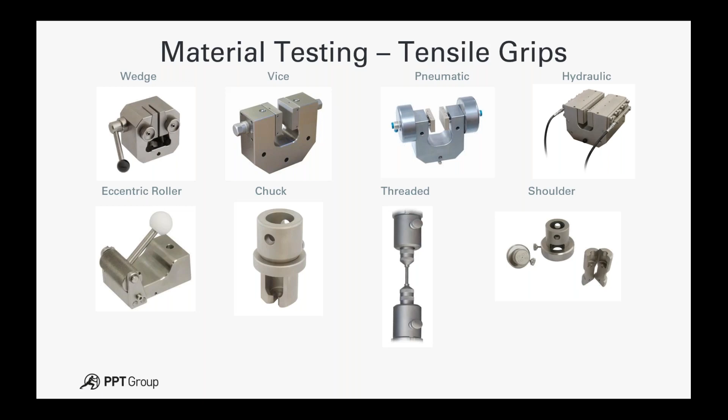Or if you just want to hold typically the round samples by the shoulder of the dumbbell, you can use a shoulder grip. And then other materials like ribbon and webbing have specialist grips, as do ropes, yarns and threads for the textile industry. And then something generic like a pincer grip.

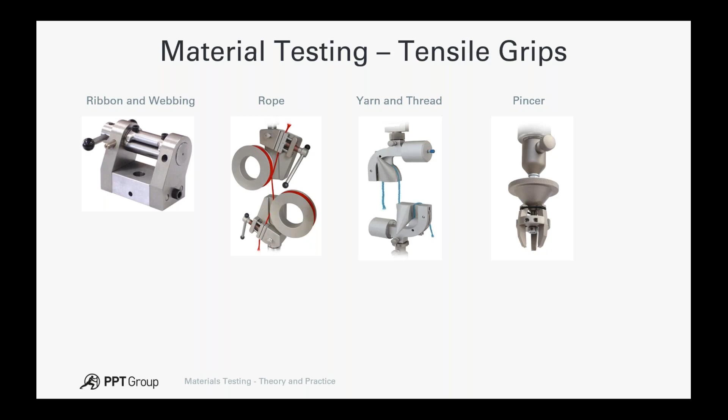There are even many more types of grips than this that we can facilitate for different samples. And of course, each one of those grips, or the majority of the vice grips, wedge grips and stuff, have different faces, so faces tend to be interchangeable. You'll select the face based on the material you're testing. What you're trying to do is create the maximum amount of friction or surface contact between the gripping face and the sample itself.

So the very basic ones, we have pyramid. If you have rounder samples, we have V-notch, which has a slight V indentation in it, suitable for round samples. Cross-cut, where rather than the hashed pyramid, it is a straight cut which goes against the direction of pull, so it bites into the sample.

Diamond coated, wave ones for textile to increase the surface area gripping. For things like paper, we have a line contact, where one face has a bar with a single line going across it, and we have wide V and rubber faces. You can also get plain faces. These are quite useful for testing some materials where you can bond a surface coating onto the plain face. People tend to use things like sandpaper and wet and dry paper to give a bit more friction - that's something you can do with a plain face.

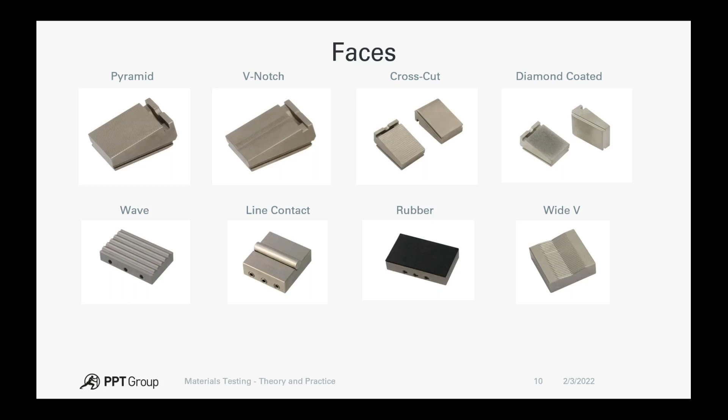So some considerations when you're looking at your tensile grips. First of all, the tests are performed within the grip operating range. Grips are sold or manufactured to have a maximum rated force for the grip. This is not just about the physical test itself, it's for the structural integrity of the body of the grip. So bear in mind, that's something to consider when choosing a grip based on your maximum forces involved.

Your clamping force is contained within the grip body. What we mean by that is you'll maximize the amount of contact area between the sample and the face of the grip. You can cause damage to grip bodies if you don't insert the sample correctly and use the whole of the face, or at least up to 80% of it. Otherwise, you're pinching the end and mechanically straining the grip when it's trying to make contact with the sample.

And of course, one of the very important things is your specimen alignment. You need to make sure that your specimen, when you place it into the grip, is both centered and parallel from the top to the bottom grip. You can see on the small picture there, on many of the grips on the top we have a small sliding alignment tool, which makes it a lot easier for operators to set the depth of the sample. So when they slide it in the grip, they touch against that and it sets the specimen centered and parallel between the upper and lower grip.

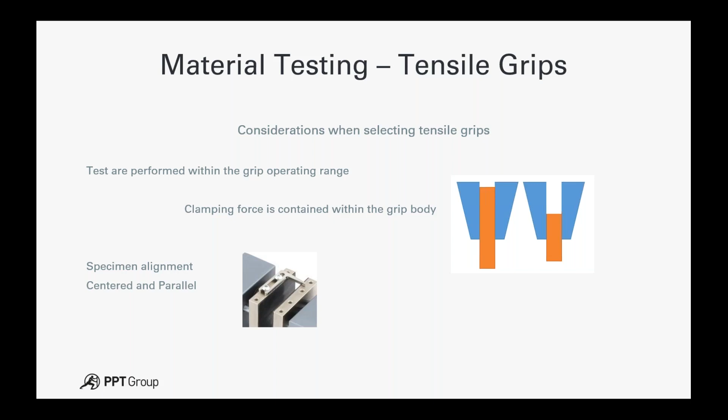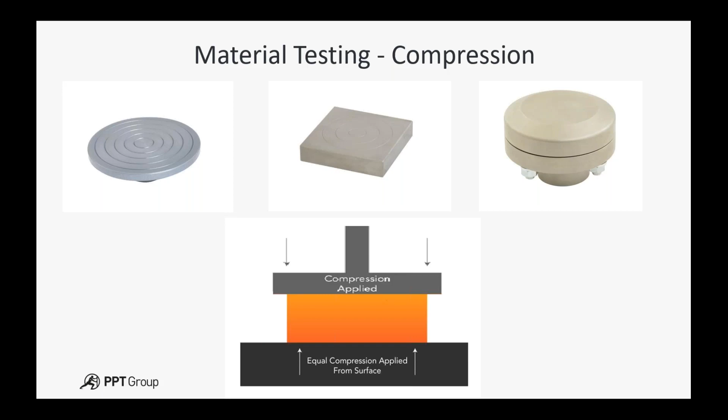Tensile testing is obviously one of the most popular ways of doing things, but also you've got compression testing. You tend to use the bottom of the machine, what we call the lower crosshead. You can have matching upper and lower compression platens, or you can mix and match them - round, square. You can have compression platens that are self-aligning, which helps somewhat with samples that are slightly irregular or not square.

So what to look for when you're doing compression testing: the plates must be larger than the sample. If they're not, you're more than likely performing a penetration test. So you want the plates larger than the sample.

Also look at the hardness, the surface hardness of the compression plate you're using. If you were doing compression on steel, you wouldn't want an aluminium plate, so you want to increase the surface hardness of the compression plates. When manufacturing your samples as well, trying to get the ends of the sample as flat and as level as possible will also help with things like off-center loading.

As I said before, you can have a self-aligning plate that does help, and we tend to recommend these for most applications. If you're looking at doing high force testing with very small distances in compression, it's probably sometimes better to involve some kind of external deflection measurement.

It's normally recommended, because you have compliance in the system. You obviously have movement in the grips and fixtures. They're normally tightened up at zero force by the operator when fitting them. You can pre-stress them and apply a force before tightening to try and remove some of the compliance. You've also got movement in the load cell, and to some extent some movement in the testing frame itself.

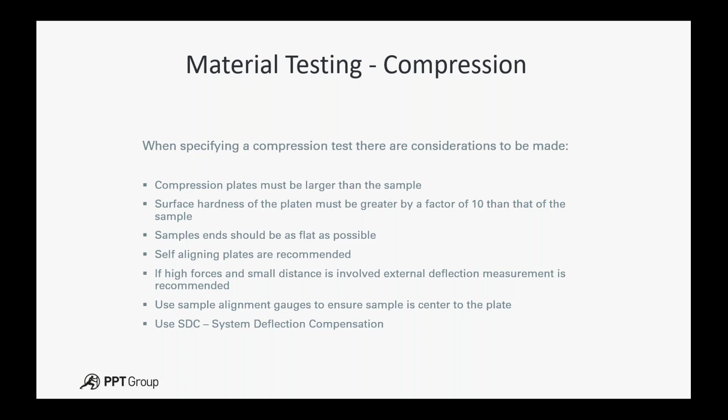Another commonly used test is the flexural or bending test. The two most common are the 3-point flexural test, supporting at either end and applying force in the center of the specimen, or the 4-point flexural test, where we again support both sides of the specimen but have 2 loading points, which can be at varying distances from the outside supports. This gives a more overall bending, whereas the 3-point gives a point contact.

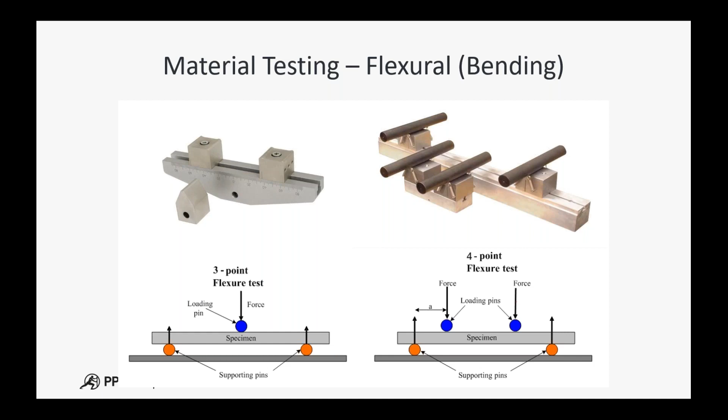But when you're doing bending tests, things to consider: is your span - the distance between the 2 supports - long enough, and what's the depth ratio? If you have a very long span and your sample is reasonably flexible, you'll be bending and moving down in the center quite a lot, so you've got to make sure the supports are high enough. Also consider your support radius, both on the bottom and the top one, which we tend to call the nose - are they wide enough and hard enough for the sample you're testing, particularly if it's a metal or a ceramic.

So, support height - ensure it doesn't bottom out. Now, are you going to use direct measurement? Are you going to use the crosshead, which measures on top of the sample, or an external device measuring deflection underneath the bottom of the sample - that could be an LVDT or deflectometer? Again, this is another case where you could use SDC, the system deflection compensation, as part of the test setup.

In 3 and 4 point testing, the peak stresses are produced - as I said, in the 3-point flexure fixture it's at the midpoint or point of contact, with reduced stresses elsewhere, so it's a localization of the stress in that area. Whereas the 4-point flexural fixture produces a peak stress along an extended region of the specimen, exposing a larger area for looking for potential defects.

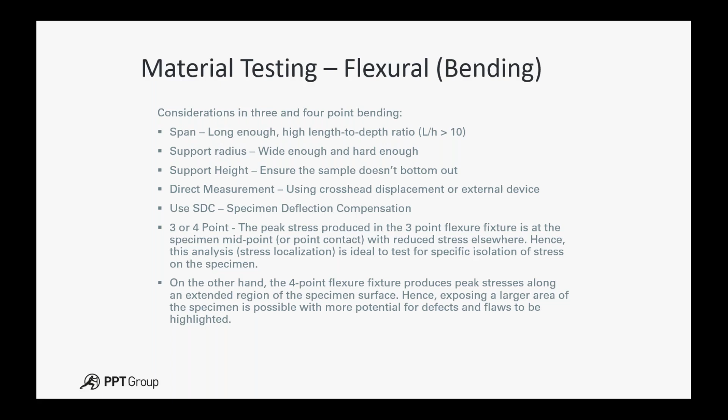Shear testing is another common method of testing. It tends to be used with adhesives and fixings where you're bonding 2 things together. You can do it in tension or compression, and there are many different types of setups for the shear.

So if you are going to do an offset shear, if we go back and look at that, you'll notice that the grips need to be able to move from both sides of the gripping face. So the vice grips are very well suited to this, because you can move the 2 faces independent of each other, so you can apply an offset.

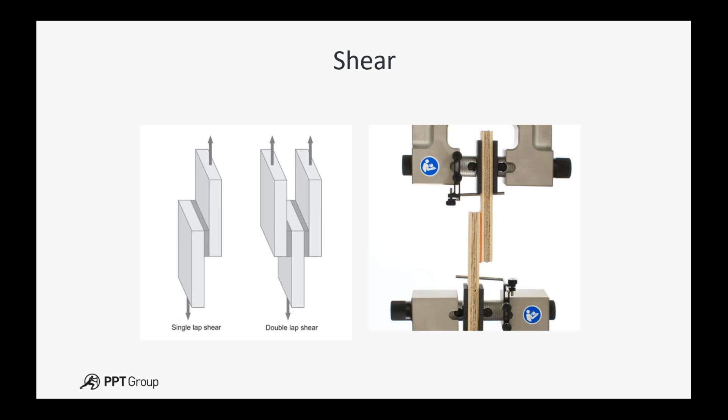If you look at that picture, the center line of the loading is down the center of the sample, as opposed to any twisting or bending motion. So there's some things like cantilever shears, rail shears, bolt shears, Iosipescu shears, where we're taking 2 halves of the sample and applying a force across them to make a shearing action.

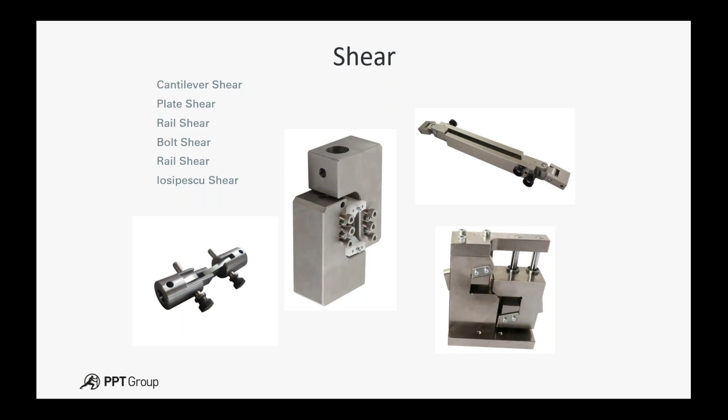One of the other things people will need to do is to prepare their samples, and there are lots of different ways of preparing samples. One of the simplest ways, which tends to be done with rubbers and thin plastics, is to stamp out the sample using a cutting die.

So you can have various shaped dies. They tend to be down to standards, but people can make custom dies for different applications. And you'll need a die press to press it out, although you can use the testing machine, because you can mount these dies on the frame of the testing machine and use the machine to stamp out the samples.

Although if you've got a lot of throughput of sample testing, it does tie the machine up while you're sample prepping. So a standalone version can either be manual or pneumatic, or some people even do hydraulic presses for doing that. Of course, with plastics, you can do injection molding.

Some companies sell small injection molding machines for making samples, or CNC profile cutters. They are actually quite reasonably priced now, even for the DIY enthusiasts. So you can use these for cutting out profiles for different materials to the required specimen sizes.

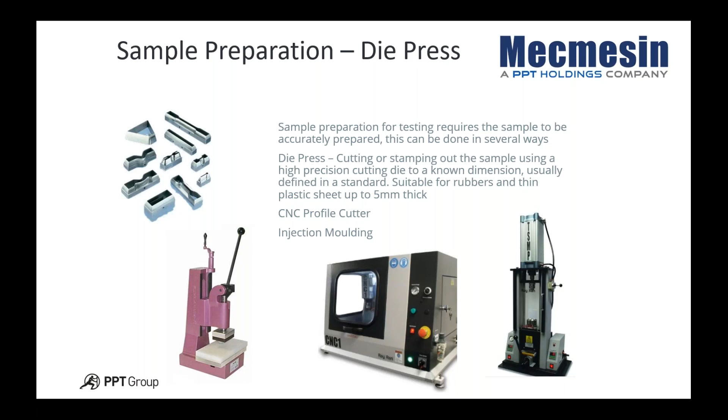They are recommended, they have their preferred sizes, although they are not fixed in stone, so you do not have to specifically use that one, as long as you're adhering to the guidance on production of the dumbbell sample, and you're getting your width to diameter ratios and your radiuses of the curve section to the end tabs. So there's some common rules in there, but the majority of people will select one of these from the testing standard

to do their testing on. And each one of these, as I say, does depend on, particularly for something like ISO 527, the type of material that you're going to be testing with.

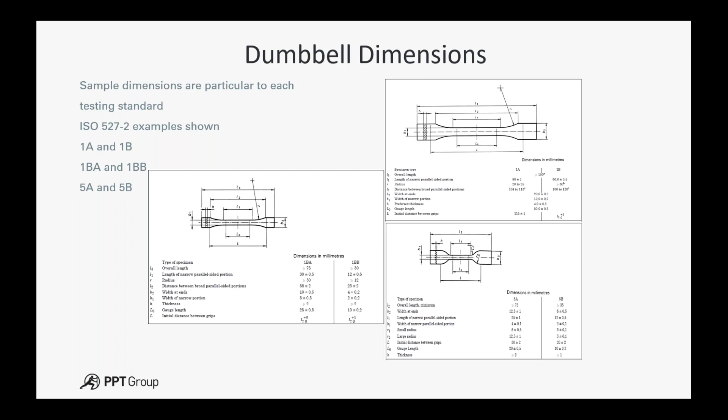So if we're doing testing, we can test at our standard laboratory temperature, or if the product is going to be used in a harsher environment at higher or lower temperatures, then we have to consider making the environment more suitable for the testing. So there's a couple of ways you can do this.

You could precondition the sample prior to testing, transfer it to the testing machine and do the test, although that would incur either heating or cooling of the sample as you move it between the conditioning chamber and the test machine, and it's quite time consuming to do. They're always a little bit difficult when you've got something that's hot or extremely cold to do.

So the solution to this is to do it on the testing machine. Now, testing machine chambers, call them a thermal cabinet or a thermal chamber.

They're limited in what they can do as far as the temperature range goes. The current ones we have range from plus 280 degrees C to minus 80 degrees C. You can obviously go a little higher, but because you're working with a limited space, if you need a higher temperature, you need to start increasing the thickness of the walls of the chamber, which will then reduce the internal working capacity of the chamber.

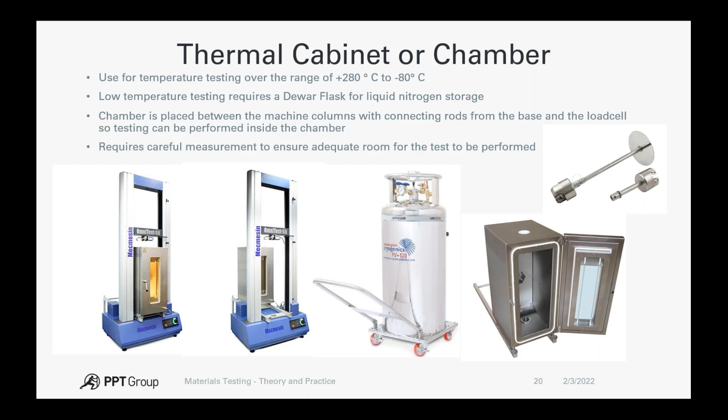They can be freestanding, mounted between the columns of the machine, with an open tube. They do have access ports on the side, so you can actually use extensometry with these, but there have to be specialist temperature-compensated devices with ceramic arms that can sit outside and go through a port into the middle of the chamber, or use things like capacitive extensometers for looking at the movement.

There's also a lot to consider now with the temperature. You are connecting it directly to a load cell on the machine, which are strain gauge devices. So at some point you need to consider dissipating the heat from the chamber, and you will need to use specialist materials. What we're also trying to do is use a material that's not so sensitive to heat, because you'll suffer from things like thermal expansion within your grips and rods. But you can null that out if you set up your test correctly—as rods and things expand, you can make the machine move to null it out and keep it as close to zero force as possible on the distance.

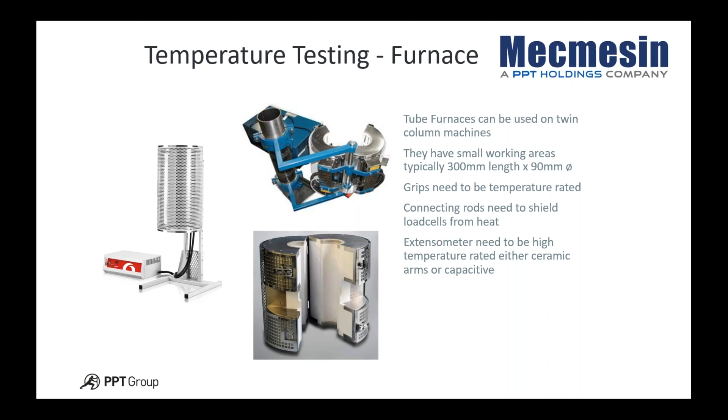We have testing frames that we use for testing, and they tend to fall into two categories: single column or twin column. The single column machines are somewhat restricted with what we call the throat depth—this is the distance from the testing area to the back column. But again, they have a small footprint. We do them on 5 kilonewton and 7.5 kilonewton ratings. So if your sample fits in the shorter throat depth and is within your capacity, then single columns are fine. If not, you tend to move to the bigger twin column machines.

We do twin column machines in 10, 25 and 50 kilonewton ratings. That's the rating of the frame, and on the frames you can fit the maximum capacity load cell for the frame, or you can fit smaller load cells. So although it's a big heavy duty testing frame, maybe up to 50 kilonewtons, there's no reason why you can't put a 100 Newton load cell on it for doing a different type of test. There's a big range of load cells.

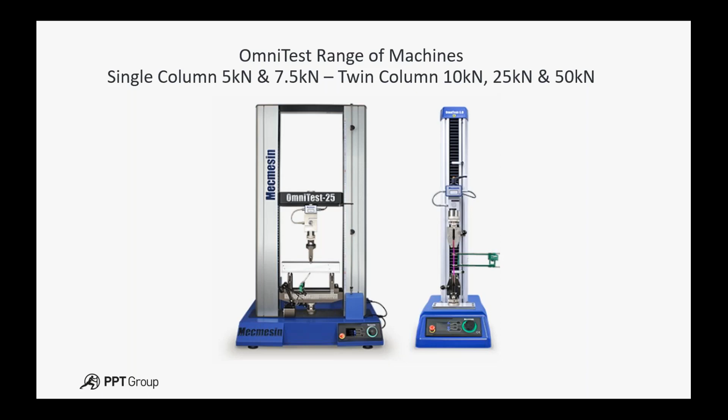You tend to want to pick your load cells relative to the work that you're doing and try and get it within the mid-range of the load cell, so you've got plenty of scope top and bottom for doing your testing. So what do we look for in a testing system?

The speed range - is there adequate speed range in the system for all the tests that you want to do? Typically, for most static machine testing, there are very few tests which exceed 1,000 millimeters a minute, and most testing ranges are down in the region of 500 and lower, unless you move into fatigue testing, and then you'd probably not be using a static system - you'd be using a pneumatic or hydraulic system.

Intelligent load cells - in other words, you plug a new load cell in because you can swap load cells for different applications. It recognizes what they are. It has its calibration data stored in there for the load cell.

The stiffness of the frame, as mentioned earlier, there's single columns and twin columns. There tends to be a higher stiffness factor in a twin column than a single column. But if you're using things like extensometry, then the stiffness doesn't come into play as much.

Speed resolution - how well you can move between your different speeds, how accurate those speeds are, and how they can be displayed on the machine and controlled. The load cell accuracy - most of the load cells we use are plus or minus 0.5% of reading. Most ASTM standards only call for something like a 1% plus or minus 1% of reading accuracy load cell. And your load cell resolution - how many digits you can see on your display and report for the size of the load cell there - also impacts your calibration range.

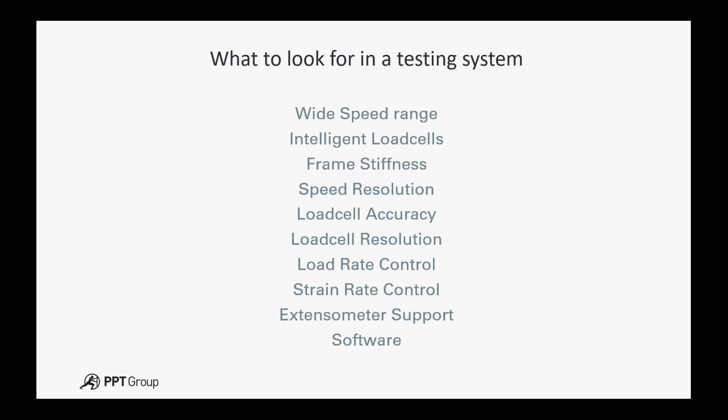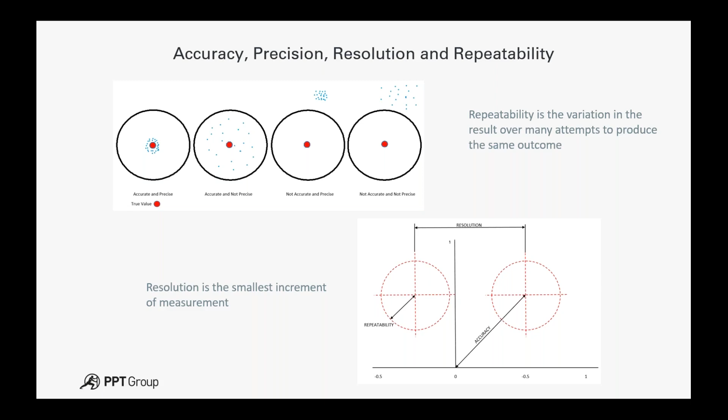One thing to consider is calibration. There are various calibration standards - the force verification standards, ISO 7500-1, and ASTM E4, and both of these are aligned through European accreditation agreements. There's also standards for verifying the equipment you use to calibrate as well.

The front of a testing machine is quite simple for control. You normally have a display and some control buttons for functionality, the ability to move the machine and position it. On the Mecmesin front of the machines, we have a scroll wheel for moving the machine and jog buttons that you can interface with.

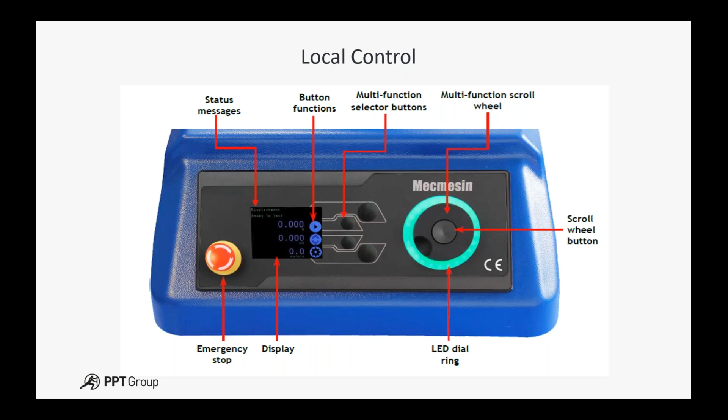For connectivity on the back of the machines, we have various ports for digital I/O and for extensometry - we have 3 ports on there - a USB connection to computers for software, and guards for interlocking if you're having a guard fitted to your system.

Looking at testing standards, some of the most common testing standards cover plastics, rubbers, flexural tests, and metals tests, each one having similar partners in the ISO standards and the ASTM standards, all really quite compatible, with some subtle differences between them, but they all tend to follow the same format.

So you're looking at, excuse me, a scope. Excuse me one second, I'll just put myself on mute.

Sorry about that, I've got a sore throat.

A scope is a brief outline, with references to other standards, the terms and definitions used within the standard, the specimen geometry, what size specimen you're going to use, testing conditions, which is the physical test itself, the results you're going to generate, and the report at the end of it. Most of them follow the same or very similar formats for the testing.

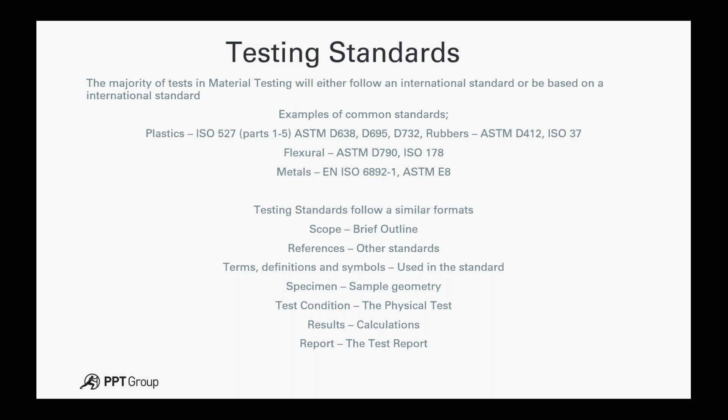So we mentioned software. The software we use is called VectorPro, our materials testing software. I'm just going to run a video now and talk over it. I'm not going to take you through all the ins and outs of the software, just show you some features we think are important, as well as doing the testing, being able to share stuff with colleagues.

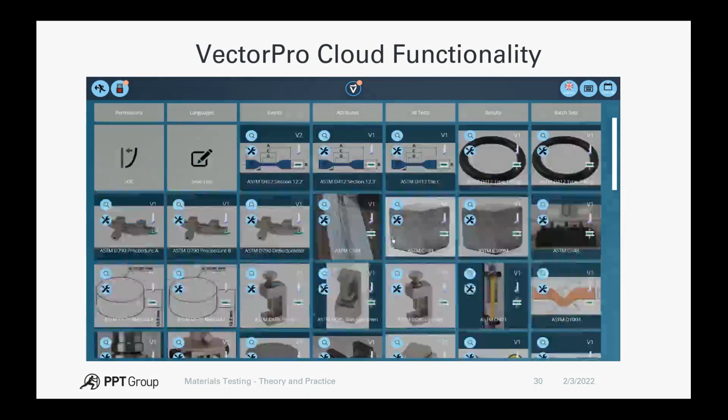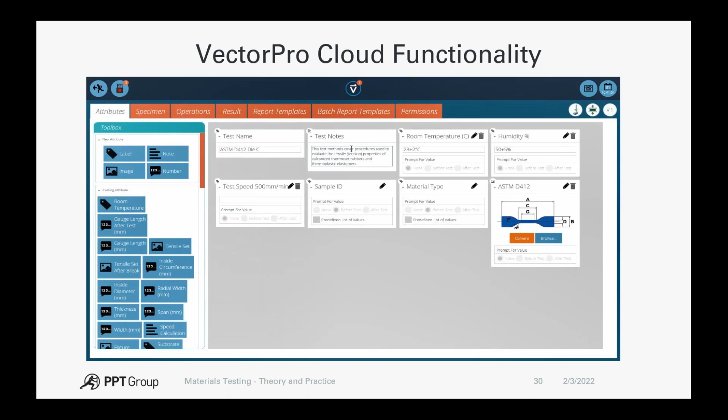So the VectorPro software, this is one of my libraries with ASTM standards in there. I put pictures on the front as a visual indication so I can see what the test is. If I go and edit this test, I can see descriptions of what it's about. There we have our sample dimensions, our test operations for movement, and some results. They all follow a similar format.

But here I've got an export feature. So if you've got a colleague who wants to replicate this, or you have another production facility and want to send them a test you've created, you can email it to them. I've just clicked export, and I'm sending this one to myself.

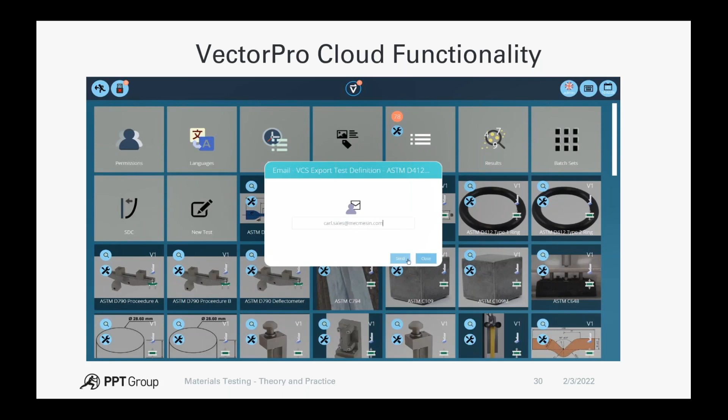If I go back to my email, I've got a link from the cloud, and if I click on that, it pulls up an HTML folder so I can see what I've been sent. Then if I want, I can import it. This gives us the ability to create tests for customers and send them out to people, and in future make them more available on our website.

So now I'm creating a blank database, putting in a new test with my name, choosing my machine, and then importing it. I'll log on to the cloud - incidentally, the cloud is free to register with. And there we go, I've imported everything from that test and can start using it straight away.

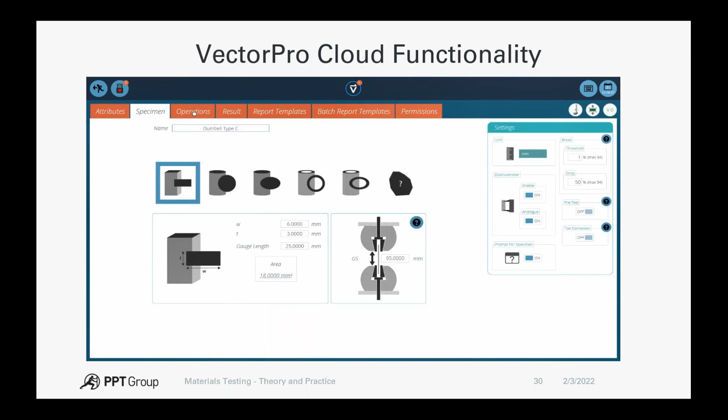So now I've got a test, but more importantly, if you're testing and need to share results with people, we go back to that test. There's a single test in there with some results, so I might want to share these with a colleague. I'm already logged into the cloud, so I can send these to somebody.

I'll send these to myself again, then go back and look at my emails. I've got another link in there from the cloud, but this time it's the individual test itself, that test graph. I can export that - it's asking me to switch over again. I go back to my version, and then import it. It gives a slightly different symbol to show it's been imported from somewhere else.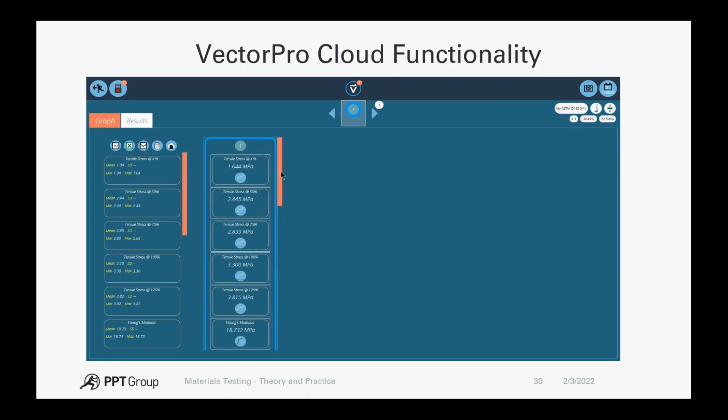But now I can go and view that, look at the results for that test. Also with this, we go back and look at the link. Because it's an HTML link, you could send this to anybody and view it on any device.

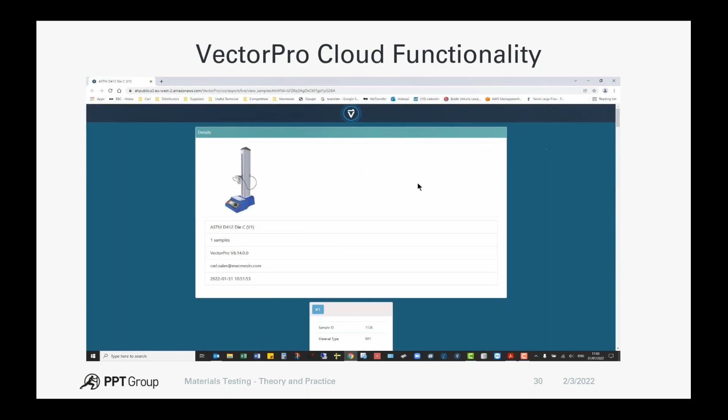So if we go and look at the actual stress and strain, we can print these and look at different versions of them. We can look at the graph itself - it's a live interactive graph. You could view these results on any HTML supported device. I can print this as well, and it's printed to PDF, so it throws out everything I need or want from that test.

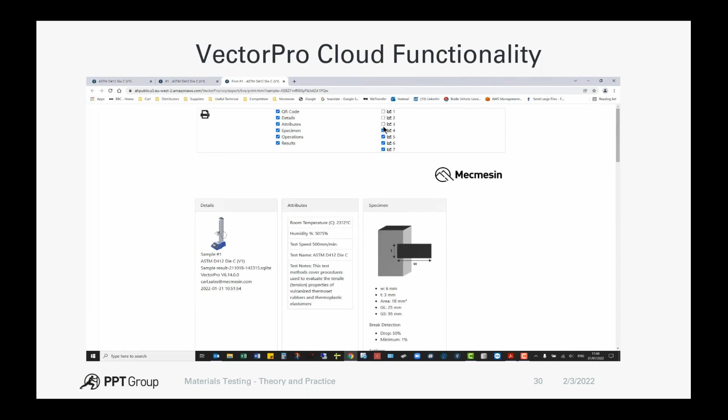It then allows me to select what I don't want, to customize the report. I'm turning a few things off here to make it a simplified report. You'll notice the top one says QR code, and I'm pressing print. There's a little QR code in the corner, as well as what I've selected.

So if you have a smartphone or smart device with a QR code reader, fire that up now and we'll look at the report. I've just created a simple report with some results and a graph, and on top is this QR code. If you have a scanner, scan that code and you should be able to get that graph with all the results on your cell phone or web-enabled device. It's a nice little feature, hopefully people have managed that.